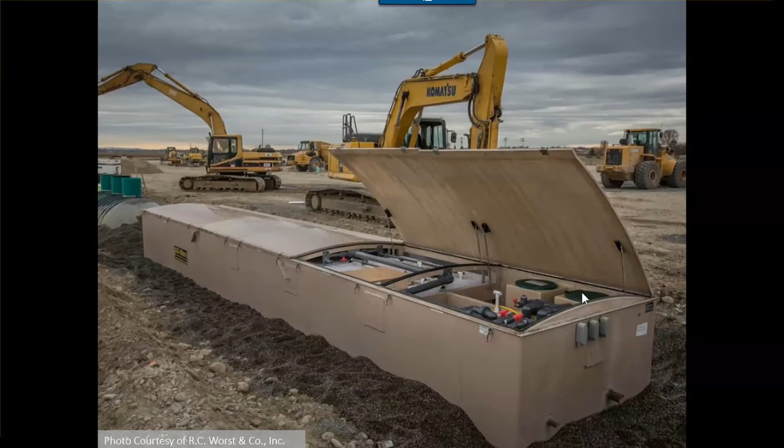So basically, what is AdvanTex? Ultimately we're looking at a treatment technology that's a textile-based packed bed attached growth system, roughly patterned after recirculating gravel filter technology or even intermittent sand filter technology that's been around for a number of years. The beautiful thing about AdvanTex and the textile and packed bed nature of the design is that it's very passive, so you end up with a progressive, passive treatment where wastewater is stored in a container and dosed over the media a number of times, giving a dilution and push of forward flow after treatment. When it's time dosed over the treatment, surge flows that come in get held up in the tank and are appropriately apportioned into the media, so those surge flows really don't cause a problem for the system.

We're primarily discharging from the AdvanTex system into soil-based disposal systems, smaller or larger soil absorption systems, in some cases flows up to 50,000 gallons per day. Currently we're working on a couple projects in Idaho that are up in the 20,000 gallon per day range. Applications include rest stops, schools, subdivisions. We've got one that's basically a steel manufacturing plant, and a beef kill plant we're working on right now down in southern Idaho. So there's a lot of different options for this if the facility is not on or close to city sewer services.

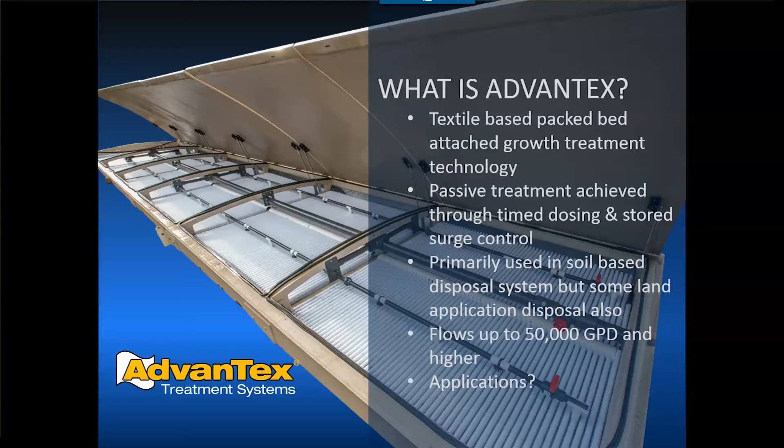The origins of AdvanTex go back to recirculating gravel filters and intermittent sand filters. Orenco, way back in probably the 90s and even before that, had been using that technology quite a bit in their recommendations, and ultimately decided to pioneer another way to perform that type of passive packed bed treatment. So instead of using gravel or sand, they're using a textile that has a lot more surface area, which is compressed and ends up in a much smaller footprint.

They started with the AX20, a more residential system with 20 square feet of textile handling 500 gallons per day, a loading rate of 25 gallons per square foot per day. The AX100 is 100 square feet, more of a commercial system, with each pod handling about 2,500 gallons per day depending on how it's loaded. With the AX20RT, they incorporated a tank into the system and put in 20 or 25 square feet of media, extending the range of one individual residential system up to 625 gallons per day with the AX25RT.

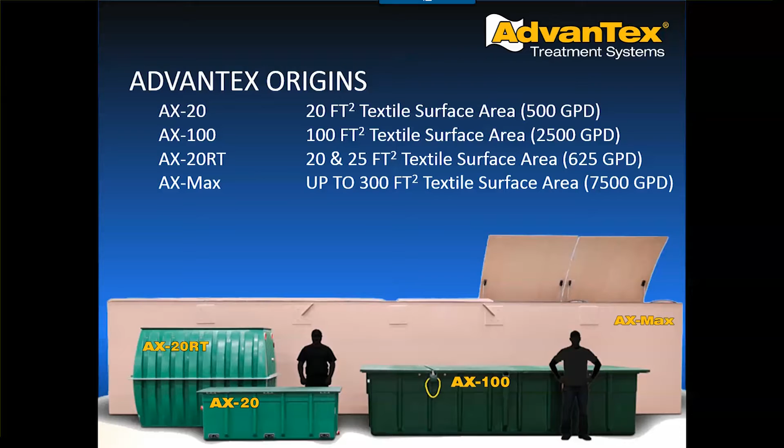That's a nice system in that you've got all the pumping equipment under one lid, like you'll see with the AXMAX unit, which is a pretty recent arrival for Orenco. The AXMAX is up to 300 square feet per unit, a 42-foot long piece. They bought a Bayliner plant down in Oregon that was defunct at the time, and they're doing fiberglass work there. These are all prefab fiberglass units, insulated to R26 I believe. The AXMAX unit is designed to handle 7,500 gallons per day each at the max size, and they have a variety of lengths and media sizes built into these.

One of the projects we did recently with Orenco and an engineer out of Lewiston is down in Challis, Idaho, called Living Waters Ranch. It's basically a Christian retreat ranch with all kinds of different activities that people would participate in. They had very, very variable flows, with people coming in on weekends in big groups, and they have a church structure.

They have a bunch of living quarters, a couple homes out there where some of the staff live, and a shop. It's all connected through septic collection. There is one facility that has a grease trap on it.

It ultimately makes its way down to, in this case, a pre-anoxic tank. I'll show you the configuration in just a little bit. But the design flow for this system is approximately 9,000 gallons per day. The peak flow could be as high as 11,000.

We calculated the influent waste strength at 200 milligrams per liter BOD, 60 milligrams per liter total suspended solids, and 65 milligrams per liter total Kjeldahl nitrogen, or TKN. Now that 65 is not entirely high for this kind of waste.

In some cases we see higher than that. Of course, Idaho DEQ for estimating residential influent calculates at about 45, which probably isn't entirely accurate from a design perspective, because normally it's quite a bit higher than that, even on residential strength we find.

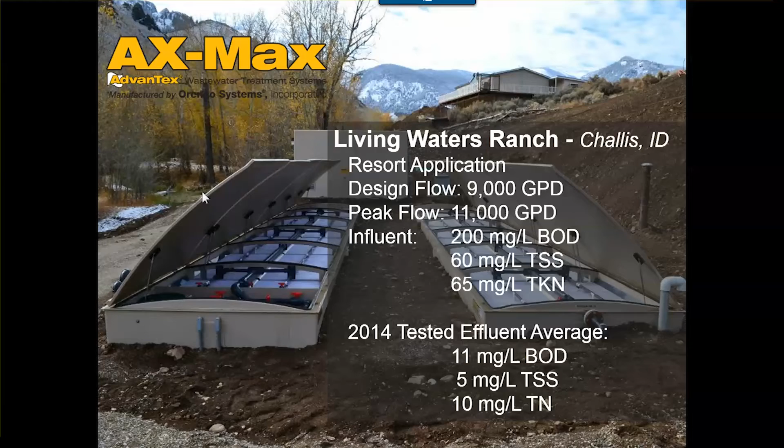This particular system in its configuration is interesting in that we were able to incorporate a lot of the controls that we have with AdvanTex. Ultimately we've got the effluent coming in from the septic tanks, and there's a septic collection on each facility, so gravity flow down into the system.

It comes into what we call a pre-anoxic tank, where we're injecting some alkalinity from the alkalinity feed system into the front end of the pre-anoxic tank to ensure that we're able to nitrify the effluent in the AXMAX units, in the aeration portion of the system, or the aerobic treatment portion of the system.

From the pre-anoxic tank, which is basically up here in the picture, the wastewater flows into the first AXMAX system. These are commonly connected, so you've got a pipe that moves across to the second AXMAX system. Ultimately, that's where the pumping equipment is located.

That pumping equipment doses over the top of each unit. There's also pumping equipment in the same location that doses out to the pre-anoxic tank and the post-anoxic tank for discharge. So the post-anoxic tank is actually connected to the discharge chamber.

So you have an amount of wastewater that goes over the top of each unit, and eventually it makes its way to the discharge tank, or the dose tank, to the discharge system.

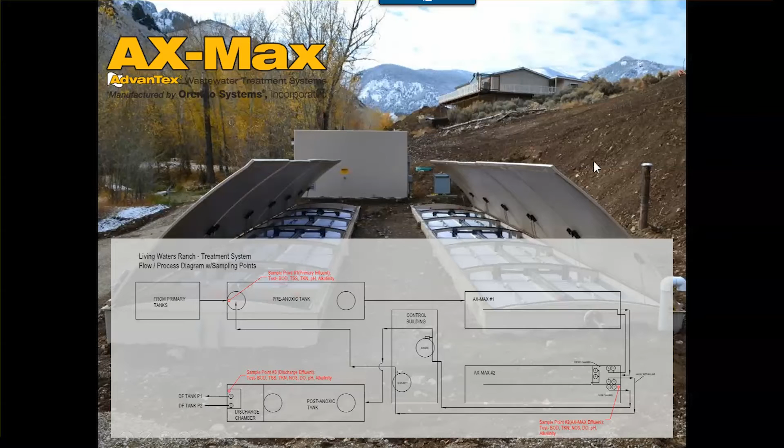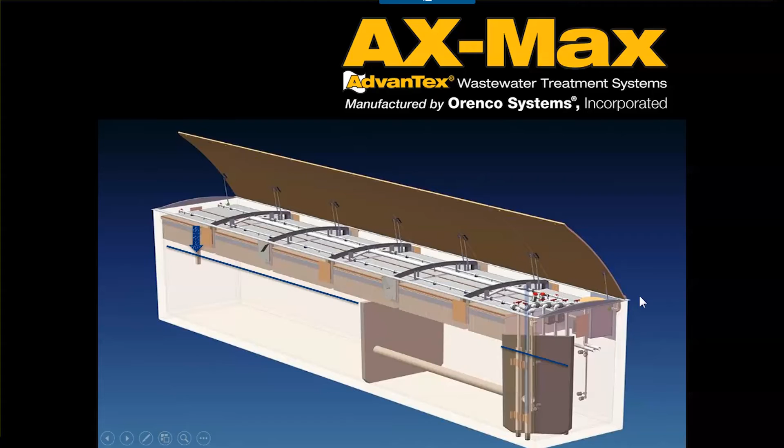So when that pump comes on a time dose basis, X number of times per day, it sprays over the top of the textile media. That wastewater falls through the media and is treated, eventually falling either into the recirc blend tank to dilute and improve the quality of it, or into the dose tank. It just continually does that. Eventually the dose tank section fills up to a point that activates a float or a timer, depending on how we're dosing out.

That'll dose the wastewater out to the drain field. In its simplicity, there's more complex ways to deal with that using pre-anoxic and post-anoxic tanks - we can recirculate back to those accordingly from that location. So that's basically in a nutshell.

If you don't have any forward flow, so water's coming in but none going out, as the water falls through into the dose tank the liquid level will rise to a point that exceeds the recirc blend tank liquid level, and then the pumps will come on and pull that down. Pretty soon you'll pull this liquid level down and eventually dose this out of water if you don't have a way to balance that. So they have a little valve, not shown in this image, that allows water to drop back through when this dose tank gets to a certain level and this tank is below a certain level. It's kind of a balancing deal.

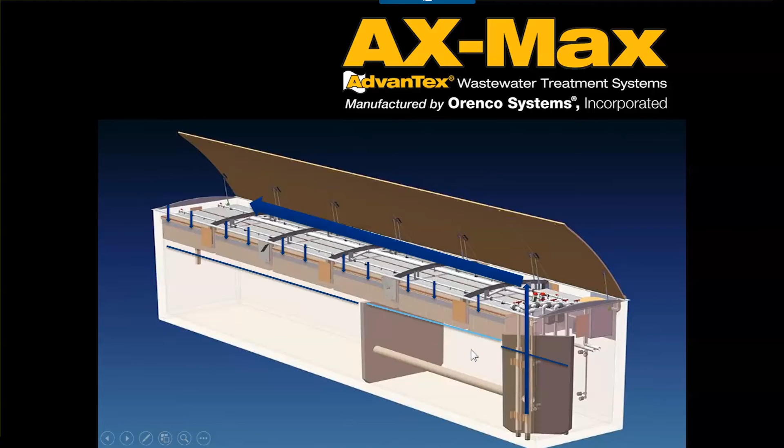Our loading rates to the media vary hydraulically, and this is how we typically size everything. Hydraulically we can load this media at 25 gallons per square foot per day, every day on average, all the time. If we have surge events that are temporary, we can load that all the way up to 50 gallons per square foot per day. We'll talk about DEQ's dual train requirements briefly in a moment, but that helps us meet that requirement because we have some surge flow built into the media loading rates.

The organic or BOD loading rates, obviously we'd want to go back and calculate all of this based on what our influent BOD is predicted to be. That's 0.04 pounds per square foot per day average, 0.08 pounds for surge. So if we've got a consistent residential strength BOD, that matches fairly closely to the 25 and 50 hydraulic loading rates.

This is the one that catches us in design sometimes - the nutrient loading rates, the TKN loading rates. This is the nitrification portion of what the system's doing for us. It has to be loaded at 0.014 pounds per day per square foot average, or 0.028 pounds per day per square foot surge, of TKN. In a lot of cases, if we have a facility with a lot of toilets and not a lot of showers, or no showers, that TKN ends up way higher than it would be in a residential project.

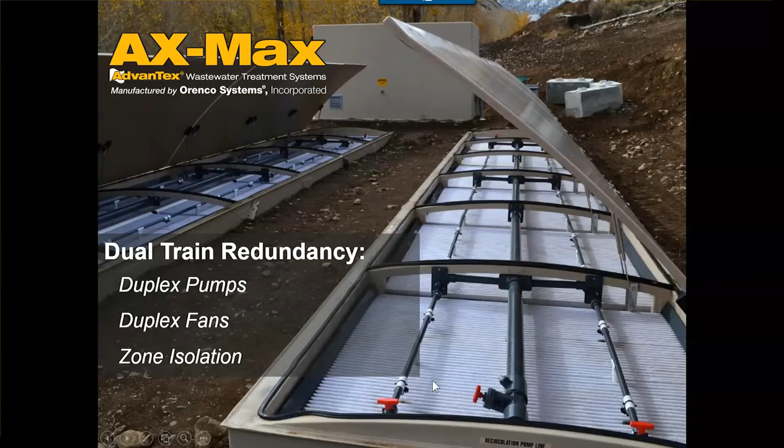So dual train redundancy. One of the things that DEQ requires under IDAPA is the dual train redundancy, and it's specific to private systems, but there's also a dual train discussion on some of the public systems as well.

Ultimately, we had a meeting with Barry Burnell and Tyler Fortunati with DEQ on this specifically last year. In these discussions, we talked to them a little bit about how we're loading this and how we have reserve capacity for loading. What they really wanted to see from a redundancy perspective is redundant pumps, redundant blowers, and some form of zone isolation.

So in this picture, we can actually zone this system off, from left to right here in the photograph. This system doesn't specifically have it, but we can put valves on these supply manifolds and zone one section of the media off if we need to address an issue.

Quite frankly, it's not entirely practical to zone it off this way, just because if you were to pull sheets, you would need to just shut the whole thing down and pull sheets and either clean them or replace them. It's a pretty short temporary situation, and during a cleaning or repair, you would have enough reserve capacity in the tankage to handle the flow, so it wouldn't be a major upset or issue ultimately if you had to shut the system down for a few hours.

But DEQ wanted to see some redundancy, so we had to show them that we could shut down part of the system if needed. So primary tankage or even process tankage, before any AdvanTex system, any pack bed filter, you have to get your waste strength down to essentially residential strength effluent.

Septic tank effluent. And so in order to do that, we're putting tankage in front of it through either STEP collection or primary retention. In this case, we've got a project down in Caldwell, Idaho. This is a big Xerxes fiberglass tank. It happens to be an 8,000 gallon that's set in front of the AdvanTex system. And they've got some valving in front of that to accept flows from a couple lift stations they've got on site.

We can also use this kind of tankage as pre-aeration. So if we have a high strength waste that comes in that we need to drop it down to the residential strength that AdvanTex can accept, we can install a pre-aeration tank in front of the primary tank or in place of the primary tank.

We also, in some cases, as part of the primary tank, turn a section of that into a pre-anoxic tank. So we have some baffling in there, and then we have some, in some cases, some chem feed into that pre-anoxic tank in order to reduce nitrogen at that point. That's recirced back to that location.

And again, ultimately in the primary tank, you have an anoxic zone. So when you recirculate the nitrified effluent back to that location, you have the ability to denitrify that, and that's the whole point of the nitrogen process there.

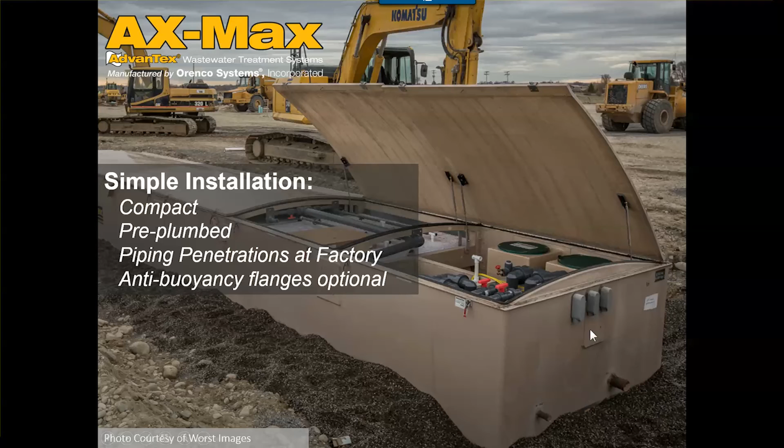One of the beautiful things about the AX-MAX package that I discovered early on is that they're very compact. They're pre-assembled at the factory, so ultimately they come exactly as you see in the picture. The lids are battened down, the thing shows up on a truck. They unload it, set it in the ground, and all the pumps and blowers are installed. There's really no assembly other than pipe and wire.

Orenco provides a full set of drawings on their equipment specific to the projects, and they're pretty good at turning those around quickly. So we have our piping penetrations all set from the factory.

In this case, we have the conduit LBs here, so the electrician can just bring that stuff in. You can't see them, but the splice boxes are on the inside where they'll run their pump and float cords to. This particular tank didn't have them, but we can provide anti-buoyancy flanges in areas of high groundwater, so that's another option for these systems.

From an operation and maintenance perspective, we have a really nice setup here to provide access with a hydraulically assisted lid over all of the equipment. As you can see, the pumps are all set in there. They're all high head effluent pumps, basically fairly lightweight.

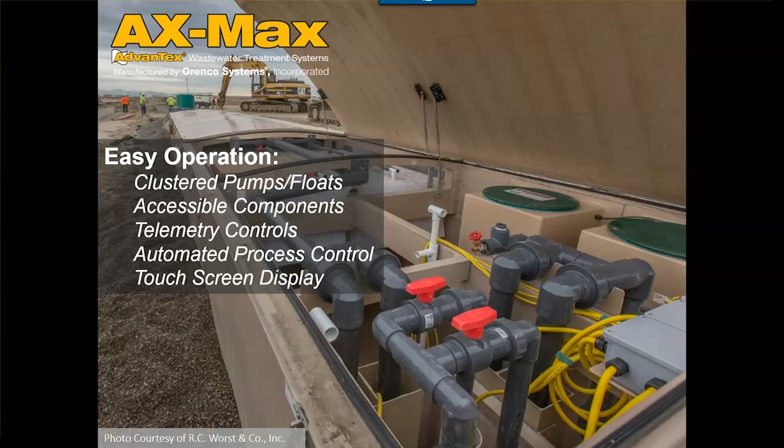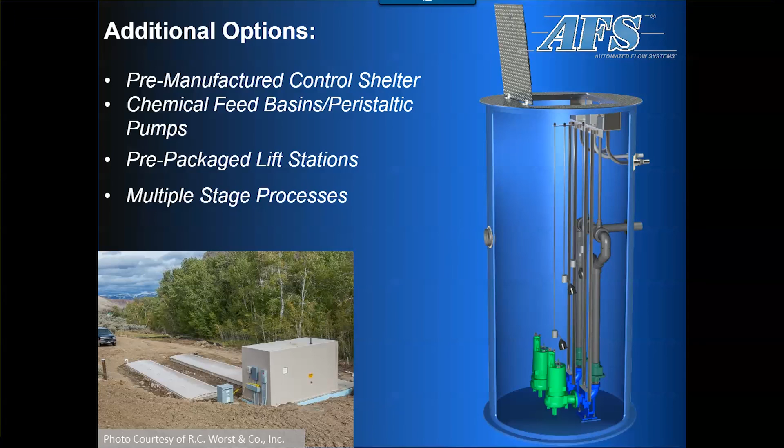Some of the additional options we offer through Orenco, and some exclusively through R.C. Worst & Company, include Orenco's pre-manufactured control shelter. As you can see in that picture, this is again the Living Waters Ranch project, and that control shelter was part of that project. They poured a base for it, and we put that down, and it's got the chem feed and electrical controls in there—it's an insulated, environmentally controlled building.

We have some pre-packaged lift stations that we offer as R.C. Worst & Company. On the project down in Caldwell that I showed you previously, that lift station is built and provided by us, and those can come in a variety of configurations. We can do solids lift stations, and we can also do effluent dosing lift stations if we have to dose out to the drain field.

And then the other thing is, if we have to get sophisticated with treatment levels, we can provide other stages, other parts of the process. I mentioned a little bit about aeration, but there are other things we can do in order to improve treatment quality if required.

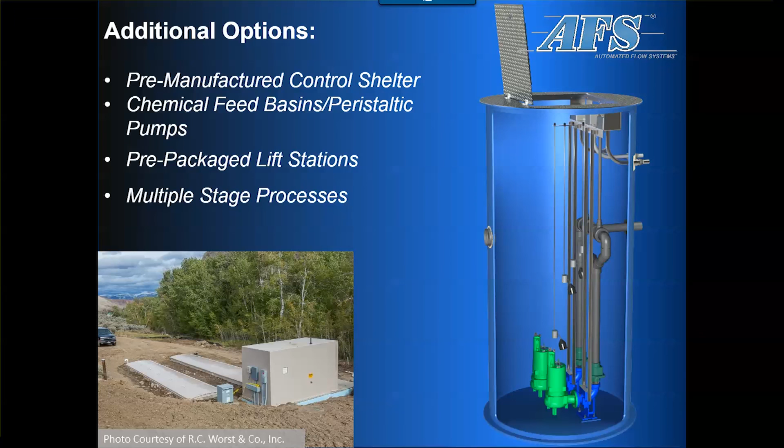So essentially that's the presentation. R.C. Worst & Company and Orenco are fully capable of providing any process guidance. Orenco provides a design criteria document, which we can certainly walk you through and help you with in terms of applying the technology.

That design criteria document obviously provides some really quality calculations and support for applying the product, and we can do plans review. We can even do, in some cases, some plans preparation and engineering if that's something you need. We try to stay out of that just to not step on anybody's toes, but that is something available to you if you're looking for help on these things.